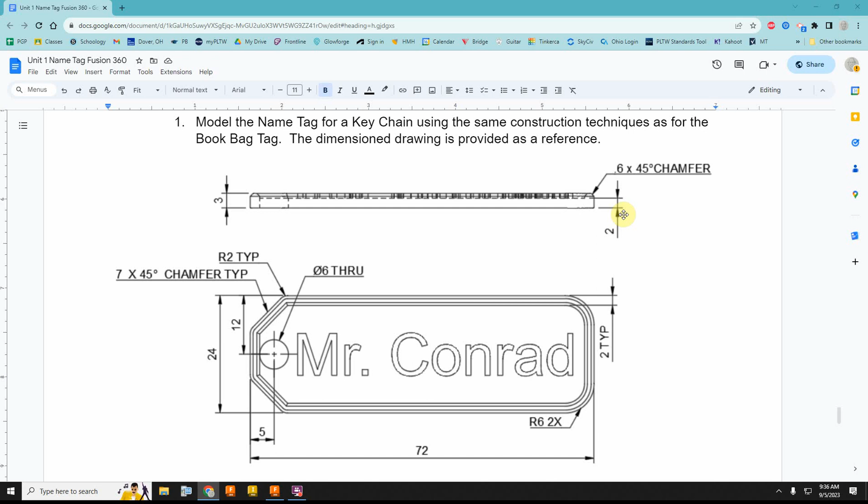Okay, this is the keychain size of this activity as opposed to your luggage tag for your book bag size. So this is going to be a little smaller, so this would fit on your keychain in your pocket easier. Overall size 24 by 72 by 3 millimeters. That's 3 millimeters including the height of the border and the text. So it's 2 millimeters before we add on that border.

So if I'm back in my Fusion, we want to make sure that our dimensions are in millimeters. I have already saved this as keychain with my initials. We'll go ahead and save it. Okay, and we'll build this exactly the same way as the other one. We'll start with a box.

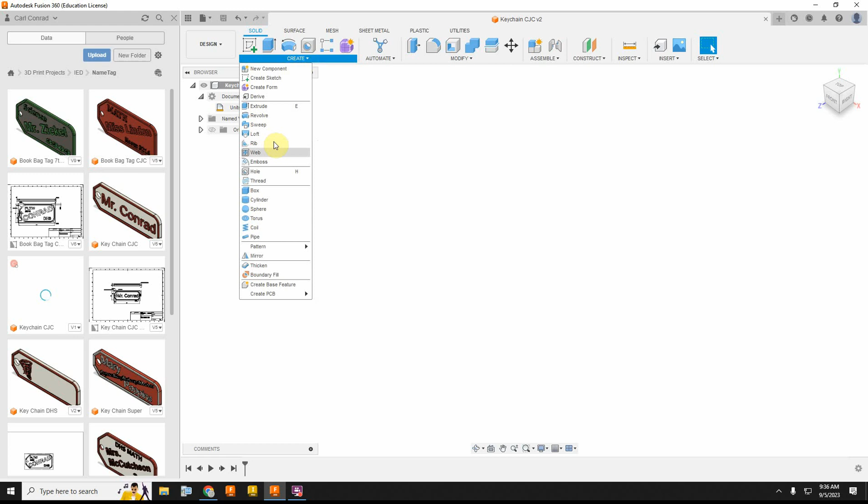Go ahead and click the front, click the origin, and we'll go 24, hit the tab button, 24 by 72, hit enter, extrude at a distance of 2 millimeters, and there's the start. We'll go ahead and chamfer, click those edges, and that was supposed to be 7 millimeters.

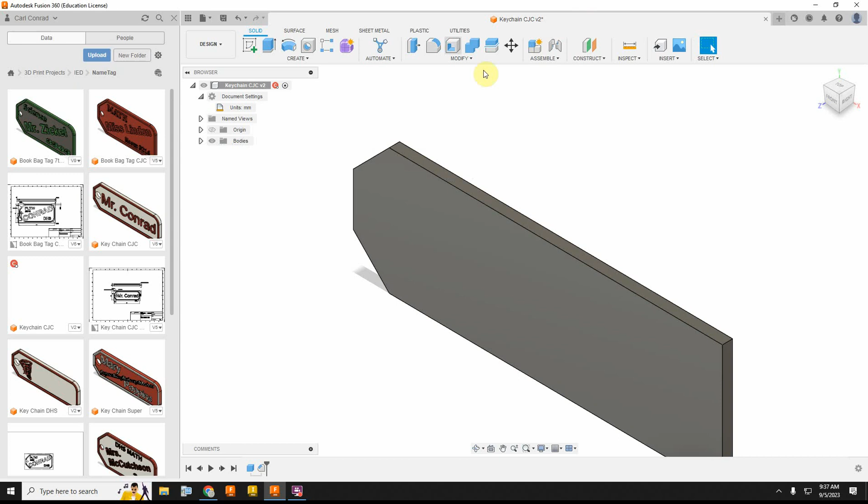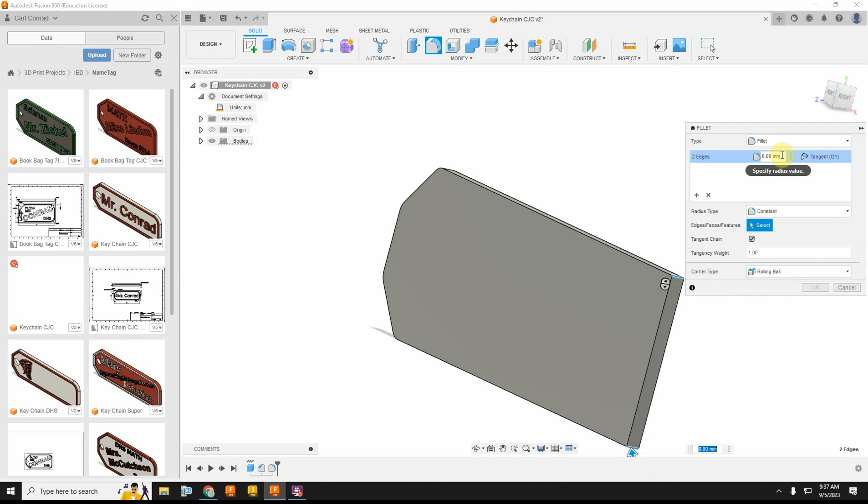We'll go ahead and fillet, and I'm going to move this around so I can see all 4 of those edges on this side, and those we want to be 2 millimeters. And then the other ones on the other end have a fillet size of 6 millimeters.

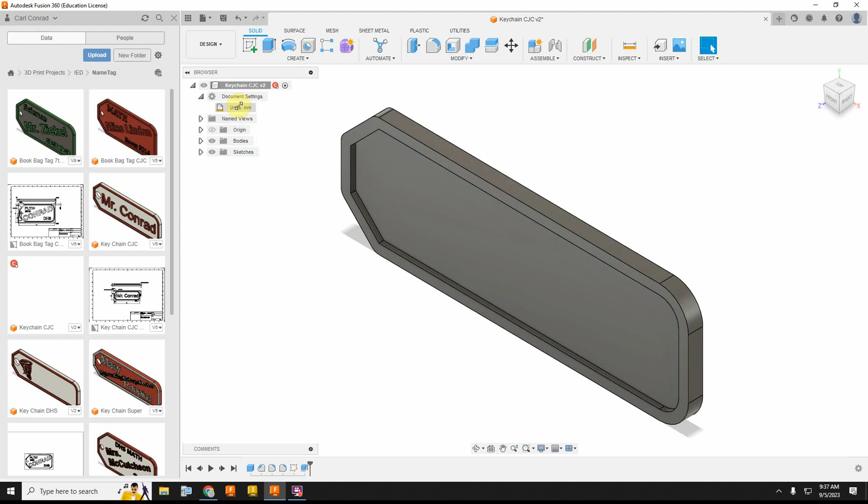We'll put a sketch on the surface using the offset tool, -2 millimeters. Finish that sketch and go ahead and extrude that picture frame a distance of 1 millimeter. And then chamfer, what I can do is I can just select that picture frame and make it 0.6, and that chamfers the entire picture frame, both edges. Okay.

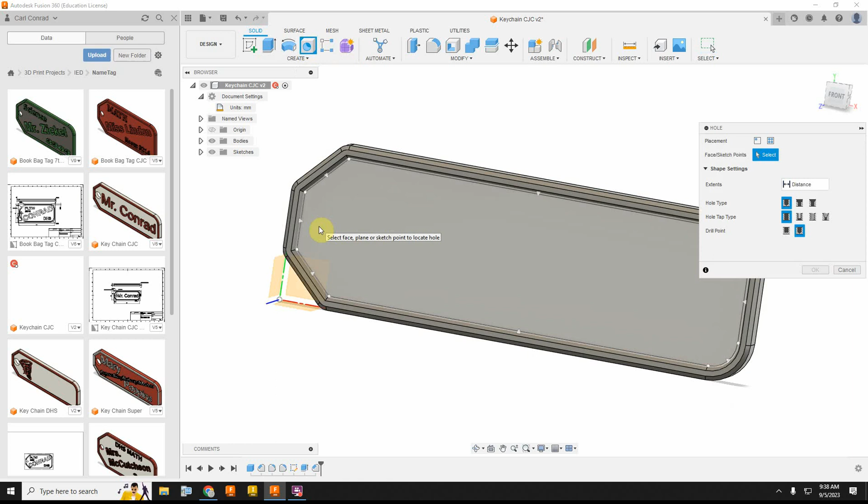We need a hole, so I'm going to select the surface. The diameter of the hole is 6 millimeters. And then we have to select where we're measuring from. So if I measure from the bottom edge, and I'm getting an error, so let's try that again. 6 millimeters. I just randomly selected that surface.

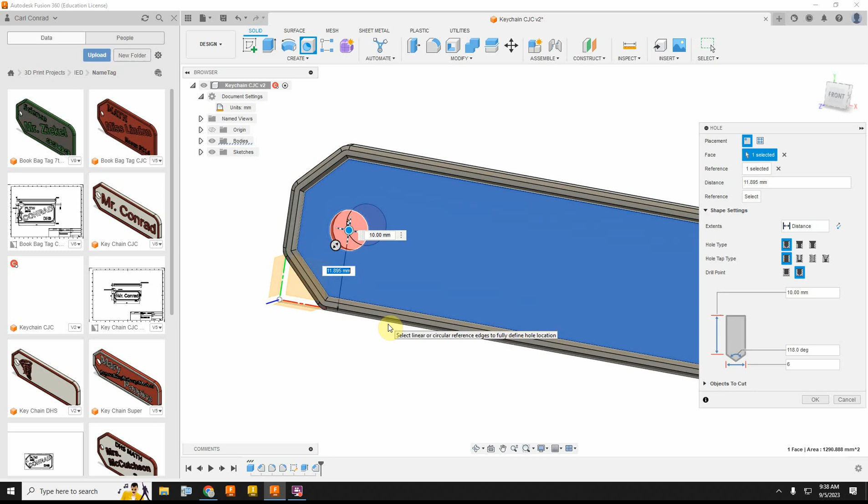Let's go to the bottom. That should be 12. And go to the left edge. That should be 5. Okay. And the distance should be through all. You can say okay, so now we've got our hole completely drilled.

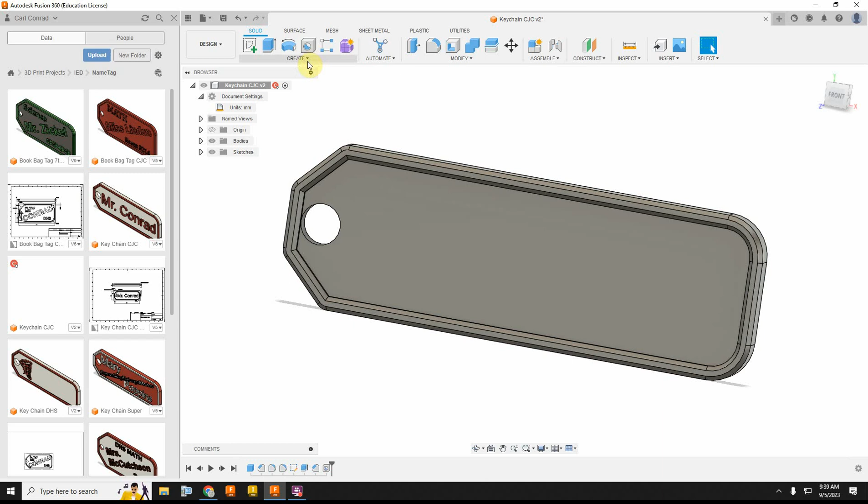Now for your text, you have to do a sketch on that face again. And let's go ahead and create the text, draw a nice big text box. And I recommend you use just your first name or last name on this, and try to get it with a text that can be maybe 6 to 7 millimeters in height.

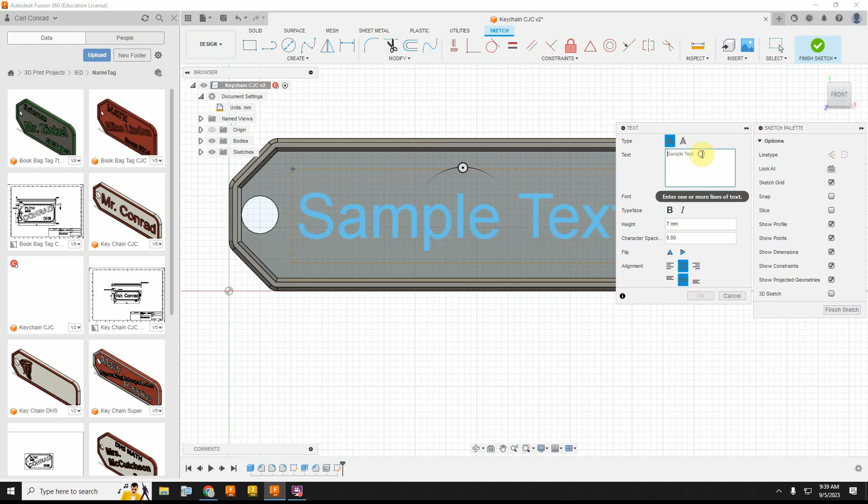Something else you can do if you want to try to center this, I'm going to do align center and align middle. And let's see here, go ahead and type my name. Let's see how that looks. Okay, looks pretty good. I might even be able to go as big as 8. I guess it depends if I was going to go bold or not. We'll fix this in a second.

The other thing we can do is we can use some geometric constraints. I've selected collinear up here, so I'm going to select that with the right edge, that with the top, that with the bottom, and then let's go ahead and go tangent, that left edge of that rectangle tangent to my circle, and there we go.

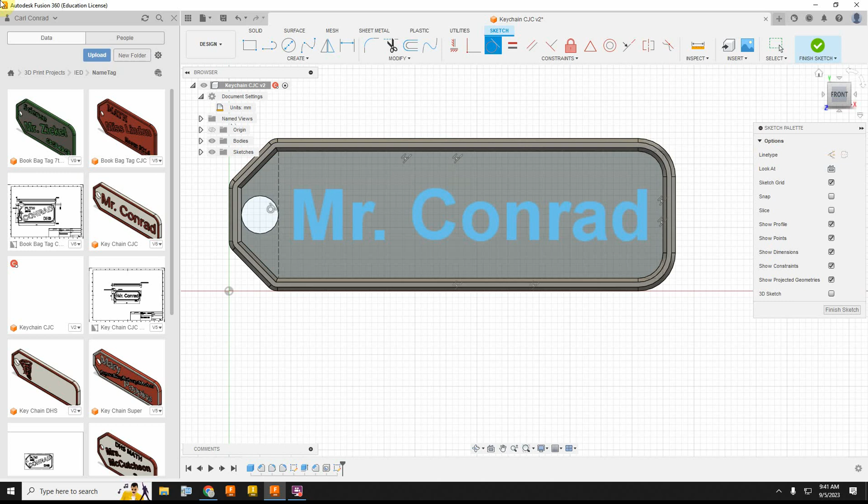So that's an easy way to kind of size that text box, and it also centers everything up for you. Or you can just move it around. This is not absolutely critical. Go ahead and finish the sketch, and of course extrude your text a distance of 1 millimeter. Okay, don't forget when you're done, make sure you save it.

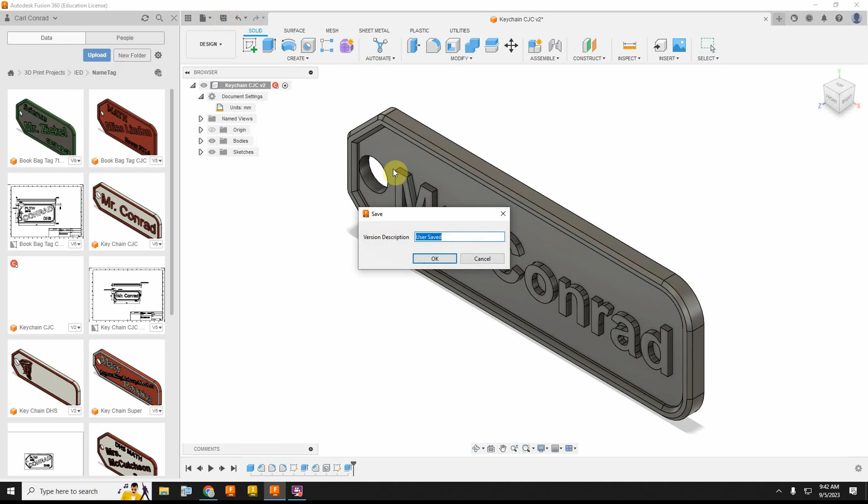Okay, then you're going to go to your 3D print option, uncheck Send to 3D Print Utility, make sure you're exporting as millimeters, pick your part, say OK. You need to make sure that this is going to go into, let's try that again. 3D print, click the part, say OK.

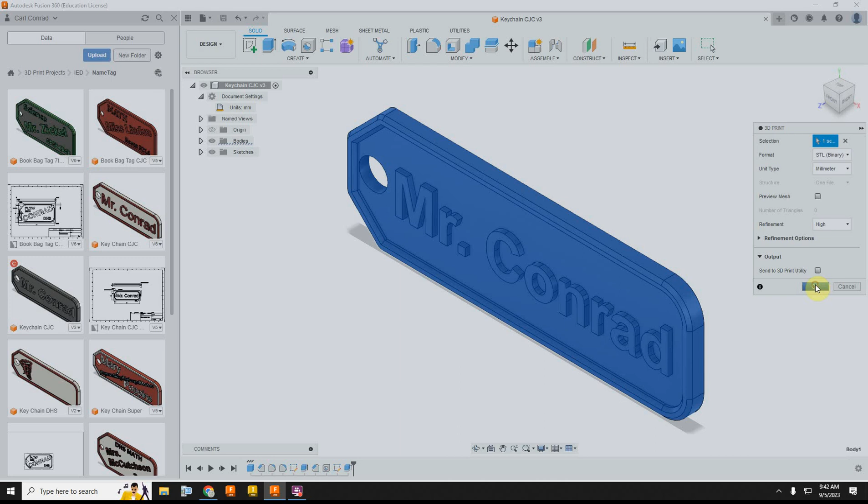You want to make sure this goes into your 3D print objects, and this time you want to put it in the KeyChain Name Tag. Give that an intelligent name, keys, my initials, save the file. Okay, so there's the KeyChain version of the name tag.